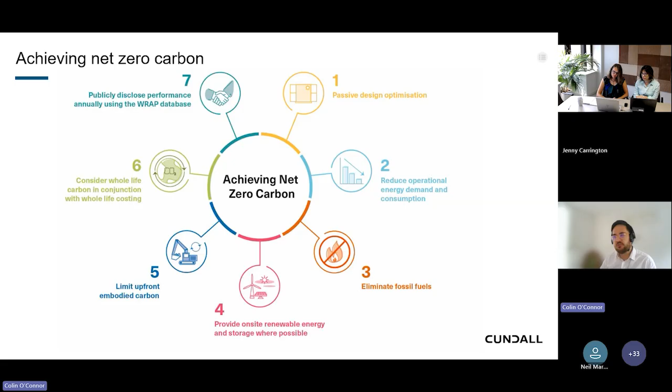I know from an acoustics point of view, we generally look at passive design optimization. Then steps 5 and 6 is looking at can we limit the amount of embodied carbon we might use through our material selections, and tying all that together.

But just one thing - I know I've spent the last 2-3 minutes talking about net zero carbon and lowering carbon. I think it's important from a sustainability point of view not to get stuck in the carbon tunnel vision. Now it's a nice picture that we adapted from another source, but I think the idea is there's so many items that surround what does sustainability mean, what does good design look like, that it's easy to target on net zero carbon and bouncing between operational embodied carbon and energy efficiency, but there's so many other things that are involved with it.

There's the health and well-being side, there's social value, there's air and water pollutants, toxicity - how it all surrounds encompassing. So I think for us as acoustics, lighting and air quality people, it's trying not to get too targeted on the net zero carbon thing and understanding that it's still a wider range of goals that we need to look at.

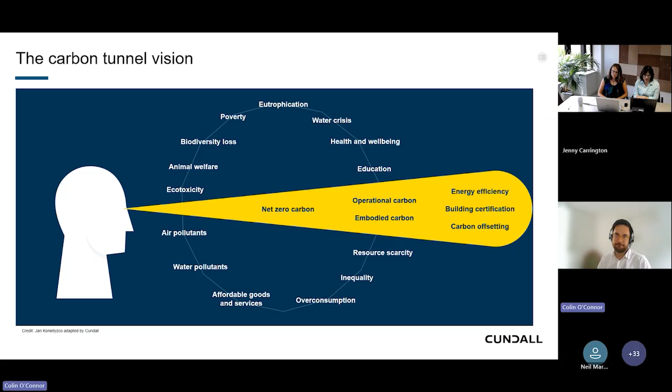And just a final bit on sustainability certifications. A large part of what we look at in terms of the accreditation and the points and the metric scoring systems that we use to determine how workplaces and buildings, what their sustainability rating is, as it were. There's quite a few different systems out there, but a lot of what we look at for ourselves is the US Green Building Council's LEED - so that's how green a building is.

BREEAM, which looks at both the building energy use and the environmental aspects of that, along with the health and well-being of the occupants. And then there's the WELL certifications, which really focus on the well-being of the occupants. So those are kind of the 3 we tend to look at here in the UK, at least.

So moving on to some acoustic case studies. So yeah, acoustics and well-being. I think just first and foremost, thoughtfully designed acoustic environments help to reduce stress, improve concentration.

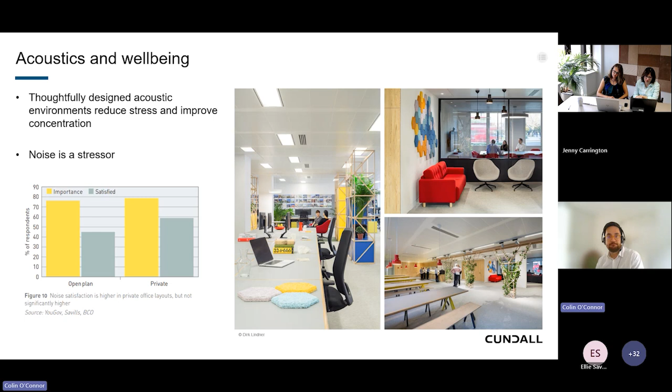Now, looking at sustainability in acoustic design, how do these begin to interject beyond just the health and well-being side of things? So, a short history lesson from an evolutionary viewpoint: hearing is one of our key survival mechanisms. It essentially allows us to listen out for danger even when we're sleeping.

Leading up to today, you've got documents over the years such as the World Health Organization guidelines for community noise and environmental noise guidelines. There was also a House of Lords Science and Technology Committee's inquiry a few years ago that found up to 130,000 healthy life years were lost in the UK because of noise pollution in 2018, and that 40% of the population remain exposed to harmful noise levels from traffic pollution.

Also recently published was the Institute of Acoustics Sustainable Building Acoustic Design Frameworks. This is beginning to really look at what we're doing with regards to materials and embodied carbon, to take that next step on the sustainability journey.

And there's items in there as well. So how do you plan for sustainable design? It's things like avoiding over design, not doing too much, but still providing good acoustic requirements needed for use of the space. Specifying good materials, so natural recycled products. Does it have local production? Does it have a sustainable manufacturing process?

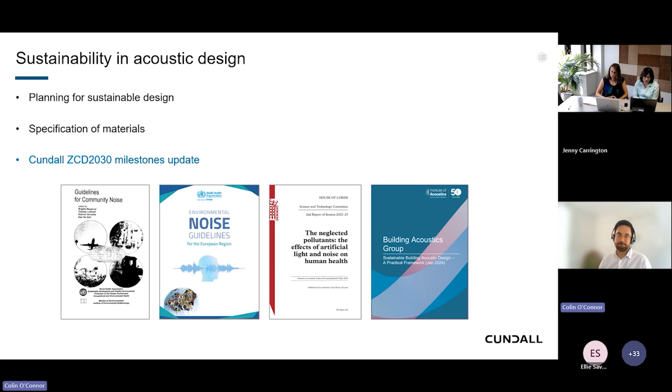Got a case study here of how we're actively looking at this, and how it all overlaps. So I spoke earlier about speech masking. You often see it in a lot of offices, either outside private meeting rooms or within open areas, where you've got the problem of needing good acoustic performance for occupant well-being and productivity.

But the problem is if things are too quiet, you don't have what we call a noise floor. So you can hear private conversations happening. If you're trying to concentrate, you can hear lots of other people talking and it can disturb you. But if you increase the noise a little bit, it starts to cover that, so you don't notice it as much. Think of it similar to a waterfall or a nice wind rustling the trees - you don't notice cars driving by as much. So how can you simulate that in an office place?

The solution is speech or sound masking - adding background sound by installing a speaker system throughout an area that increases noise and reduces the amount of distractions available. So that's the concept acoustically of speech masking and what the benefits are with regards to well-being and occupant use.

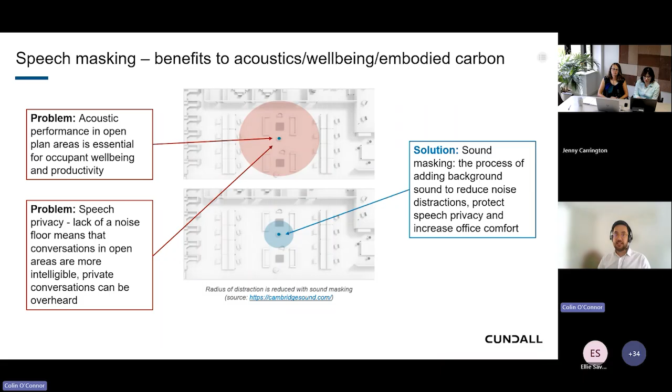But then tying that into certifications I spoke about earlier - one of the certifications relating to occupant well-being suggests that to maintain speech privacy between private rooms and people outside a meeting room, to avoid them listening to private conversations, rather than having a big bulky wall made of lots of plasterboard and internal insulation, if you've got speech masking in place that increases the noise a bit, makes things less disturbing and less able to overhear, you can actually reduce the acoustic requirement of your walls.

Now, the next step is some research that us on the acoustics team have done over the last couple of years - we've reviewed every single British Gypsum partition wall requirement, what materials it's made up of, what the acoustic performance and sound insulation is, and what the relative embodied carbon per meter is for those different wall systems.

So if you look at the table to the right, we can show that in line with WELL, to still maintain speech privacy, you can reduce the wall partition acoustic requirements by 5 decibels, which in turn actually provides quite a large drop in the embodied carbon that a project would be using.

So the next step we're looking at now is how to calculate that for an entire floor plate, for an entire office, and really build it up there. We've had one project so far where we've done quite detailed analysis of this, and the end story is there's actually quite a large saving, both in embodied carbon but also in cost and build time, which really benefits the client and the contractor side too.

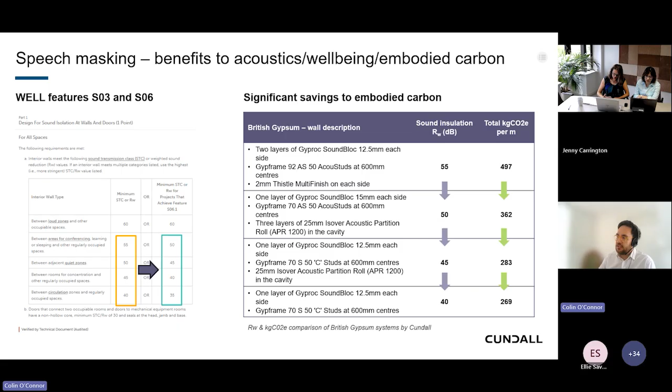Thanks, Colin. So I will be talking about smart lighting design for better living. If we move to the next slide, please.

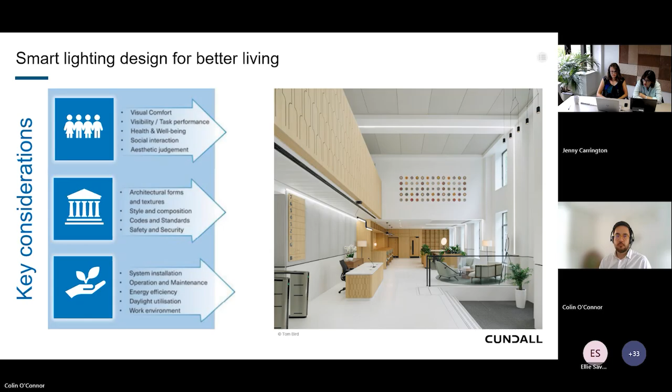So what about the environment? Our sustainability approach is based on the following principles: good quality design. A successful net zero design lighting must go beyond energy efficiency and life expectancy. The quality of the lighting design will have a significant impact on the lifespan of its use, affecting its zero design and circularity.

Adaptability of the lighting system is all about lighting outputs, layers, and distribution. It all must be flexible to allow for variable functions and future-proofing.

Lighting products should be capable of being dismantled to base components, to be upcycled or at least recycled and returned to a materials reservoir. On each project, we allow time for embodied carbon estimations, stating the benchmark in the luminaire schedules that we specify for each project.

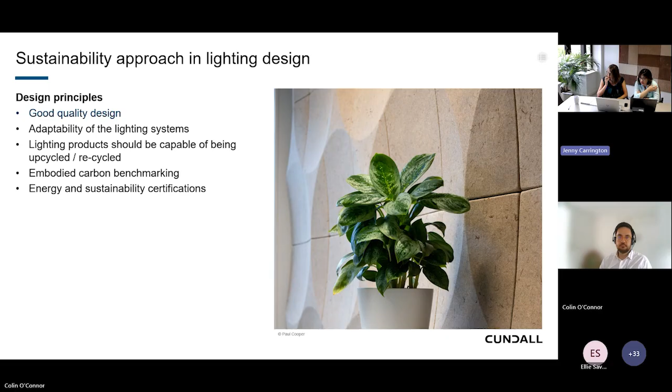We truly believe that considering the environmental impact of lighting systems within luminaire specification must become a key part of every design process. This should also include a study on retrofit and/or reuse options for existing lighting systems.

For example, when we have a project with an existing building and existing lighting, whether it's going to be a brand new Cat A fit out with brand new luminaires, or a 20-year-old university with old luminaires.

Before we start designing, we talk to the client and run a feasibility study to assess whether we can reuse the existing system, retrofit them, upgrade them, or maybe partly reuse them before we suggest something brand new. Next slide, please.

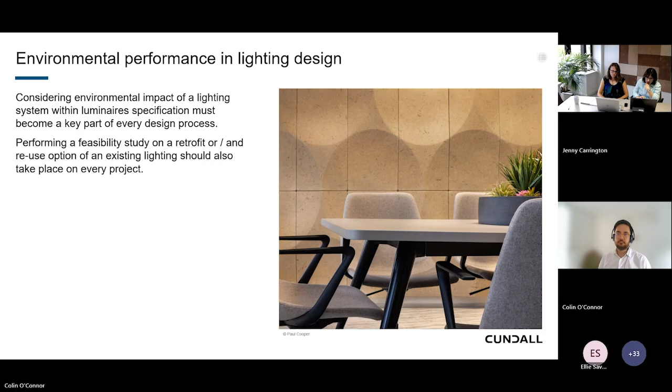On the next few slides, I would like to share with you a case study. It's a small project where we applied all the design principles I have been talking about. This is actually our Birmingham office in Cundall.

On this slide, you can see our large meeting room, where we developed our design in close collaboration with our acoustic team and utilized only the most environmentally friendly materials with the lowest carbon impact.

We also partnered with one of our lighting manufacturer partners, who helped us complete the lighting scheme that includes a lighting track, which you can see on that picture. This is actually a lighting track constructed from offcuts of another lighting track, which was specified on another one of our projects.

It was rescued from a skip on the site. During one of the site inspections, we saw that the contractor got the lighting track delivered on site in 4 meter lengths. Obviously, when they fit it in, they had some offcuts, like 1 or 2 meters of cuts, and they just didn't need it, so they just put it in the skip.

So we said, right, okay, that's not going anywhere. It's been rescued and we reused it in our meeting room, which you can see in the picture.

The luminaires within the track are reused luminaires. We got them from our partner manufacturer's showroom, which had been on show for a couple of years. Obviously, they've got new products to show in the showroom now, so these 2-year-old products which had been used in the showroom, we just utilized in our meeting room.

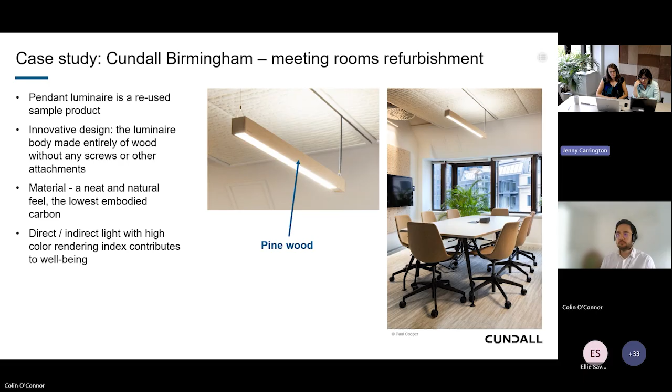This particular product is utilizing an innovative design. The luminaire body is constructed entirely of wood, pine wood, with no screws. That's the luminaire hanging above our table as we speak. The material has a neat and natural feel, with the lowest embodied carbon because it's wood. It's also utilizing direct and indirect lighting, which contributes to human well-being.

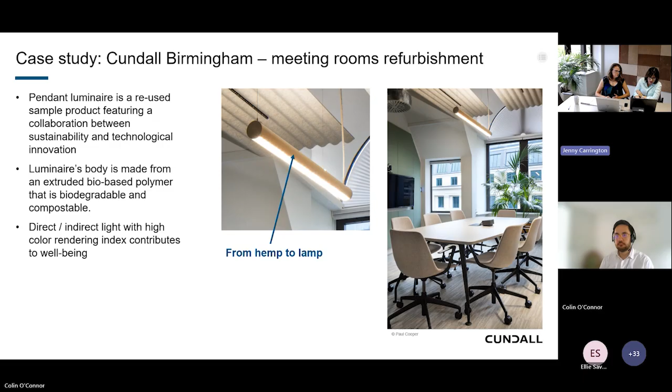Next slide, please, Colin. Thanks, Natalia. So, yeah, next slide, please.

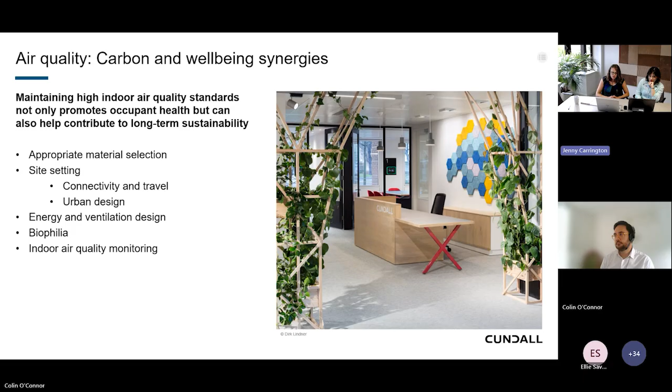As air quality consultants, we've got limited opportunity for influencing material specification. But there's various opportunities we have to look at various aspects in terms of the design process and making sure that air quality is appropriately considered. So we're going to talk about these. Next slide, please.

So, appropriate material specification - ensuring we haven't got carbon tunnel vision, there's numerous aspects that need to be considered when we're advising on appropriate material. At Cundall we've created digital passports for each of the materials, so there's various things that feed into this, as well as the origin of material and its embodied carbon. If it's appropriately sourced, that could obviously help with the air quality emissions as well in terms of transport and manufacturing, the circularity and health and well-being.

For air quality, obviously a key thing is the health and well-being aspect, and are the materials low toxicity, so that there's nothing that's going to off-gas and create issues during occupation. We sometimes look at materials inventory for proposed retrofitting or design of a space, and then we can advise on whether there's another option that might be better.

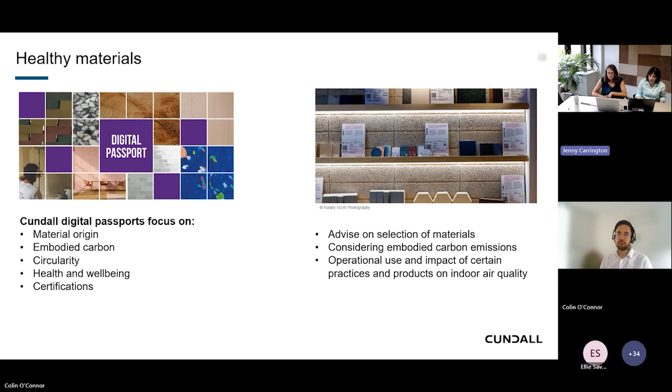Next slide, please. So, site setting - ideally we get involved as air quality consultants at early design stage, and there's various opportunities to try and influence that positively then.

In terms of the site's layout and setting, green infrastructure might seem great for carbon, but it needs to be appropriately placed. It's about looking at the wider setting of the site and trying to extend the distance between sources and receptors. If it's inappropriately placed, green infrastructure could actually make matters worse and inhibit dispersion or lead to localized issues with air quality.

We could do dispersion modelling based on a proposed layout to predict what the concentrations might be at a facade, or we might do monitoring if there's a proposed change to get an idea of the baseline conditions.

In terms of connectivity and travel, it's key to have an effective broadband network so that people don't need to commute as far, ideally, or community workspace hubs so people might come together in spaces and minimize travel time, which has an impact on air quality emissions. And obviously the provision of cycle infrastructure and network to facilitate sustainable travel options.

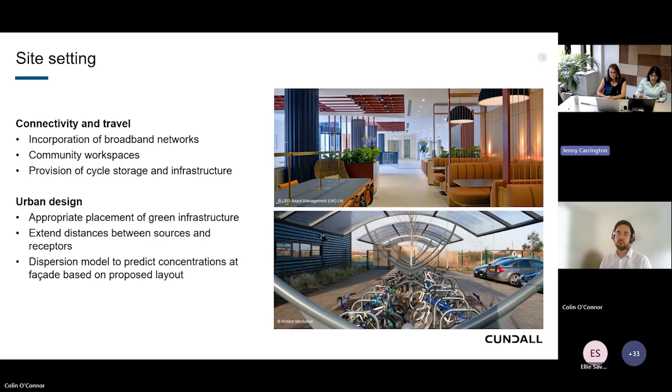Next slide, please. Key for us as well is to try and influence the energy and ventilation design appropriately. Ideally, we're luckily seeing more and more all-electric, non-combustion plant energy strategies, but sometimes there might be standby generators, so it's about trying to influence the options on that.

Sometimes we get told there are three options being considered, and the team or client might be looking at it in terms of capital cost for a given generator, but some of them might be a lower emitting option, and we need to demonstrate that - especially if there's a permit required further down the line, they have to demonstrate a best available technique. Could they perhaps look at other fuel options as well, like sustainably sourced HVO fuel?

Also, if we do dispersion modelling for a proposed design, we could look at the proposed air intakes for any ventilation and proposed openable windows, predict what the concentrations would be, and then feed into whether the ventilation strategy is appropriate.

Is filtration required for mechanical ventilation? And if it is required, is it the appropriate level of filtration? Because if we're over-filtrating, that could lead to higher life cycle and maintenance costs. Ideally, there's the option to future-proof there.

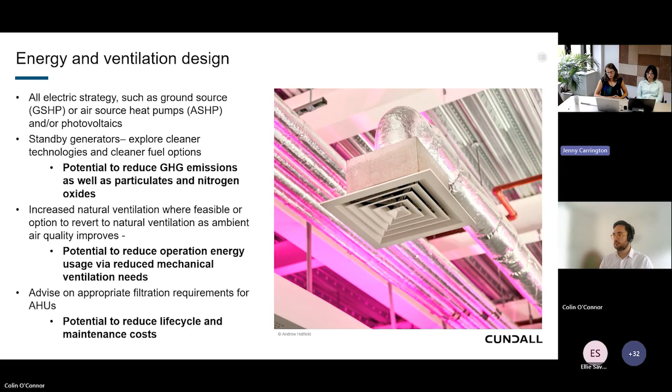So it might be that natural ventilation isn't suitable at that time, but hopefully as air quality improves in the future, that will be an option - ideally a mixed mode solution.

Next slide, please. So, biophilia - in our office, we've got a lot of indoor plants, and it's lovely for health and well-being.

It's whether plants can have a positive influence on air quality, through an impact on humidity levels. Through transpiration, the plant ends up being like a natural low energy humidifier. If you had an active green wall, you might increase the airflow through the soil, and there might be potential for reducing emissions there.

My colleague Curtis Gubb has done some research on this with the University of Birmingham. It might be a negligible impact in a busy office with a lot of people in terms of reducing carbon dioxide concentrations, but it does impact. There's also the influence of the amount of light - if you overlit the space there are various things to consider. But there is potential to reduce carbon dioxide, help humidity levels, and perhaps also nitrogen dioxide through the soil.

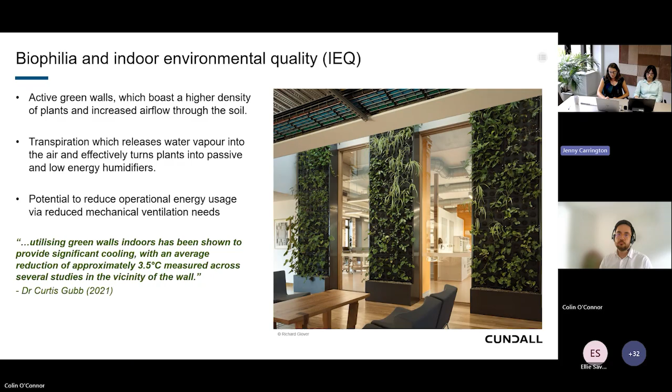So, indoor air quality testing. As a team, we regularly get involved with air quality testing, including indoor air quality testing. We've tested all of our Cundall office spaces - that image there is just one of our offices - but I'm going to talk about a case study instead.

We provided a loan of free monitoring equipment for a local charity, whose office space was very poorly ventilated and poorly lit, and there were concerns about health and well-being there. So we offered to loan the equipment for a couple of weeks to get an idea of what was going on, and it was found that carbon dioxide levels were consistently very elevated, over 1,000 ppm.

Through the study, we also noticed that the lights were regularly left on outside of office hours. So as well as looking at the ventilation and how we could advise on improving that, there was also the option to look at the energy wasted through overuse of lighting.

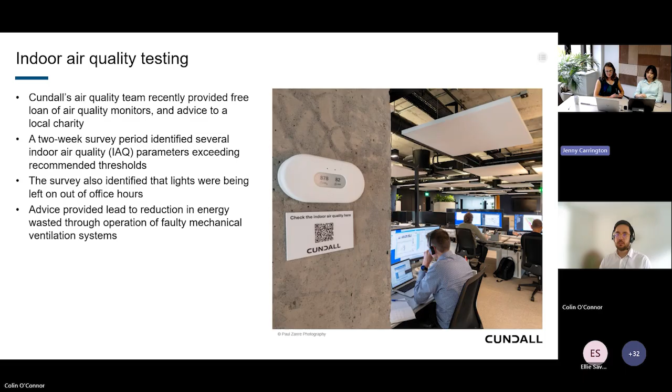Back to Colin. Thanks for that - so to bring it all together and summarize what we're doing: it's through the lens of sustainability, and there are multiple things there. It's not just lowering carbon, it's also the health and well-being of the people using the space, and looking at the materials and the circularity of it as well. So we're taking a holistic approach and a fully balanced view on this.

We've also got some initiatives that we're driving through. We have our material database - within the company we gather whole life carbon, circularity information, material health, and where we can, operational energy and acoustic performance data on a huge number of materials, which we can promote and discuss, or review what other things are being used and whether we could do better.

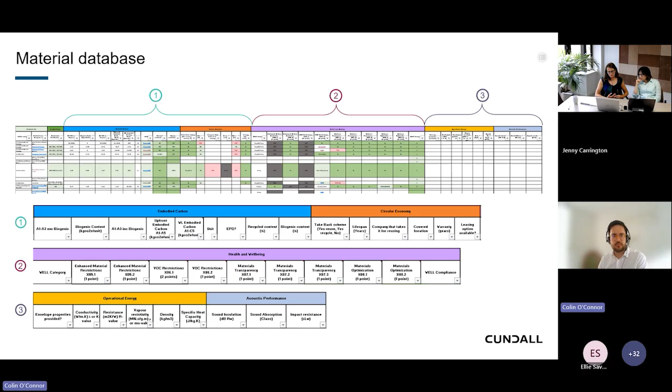We've got some other initiatives - I know Jenny touched on digital passports for a number of materials. Again, we're not just documenting the carbon view of it, but where the material is coming from, whether it's circular, whether it's recyclable, what the health and well-being aspects of it are, and how it promotes other certifications.

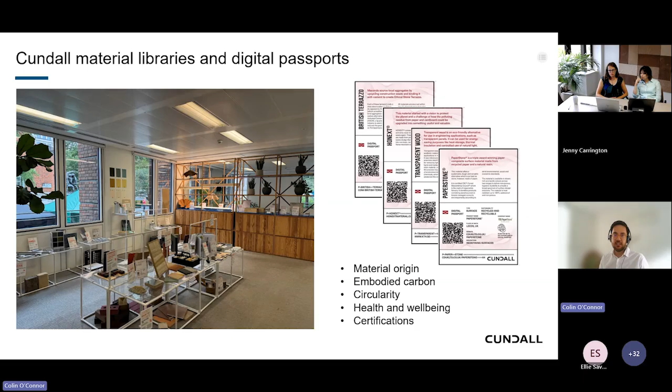In our London office and other offices as well, here's a picture of a library of lots of cool materials that we like and want to show off, working with a lot of suppliers and manufacturers to help promote what they're doing.

A little case study - our sustainability team can give a much better talk on this, but I'll touch on it quickly. We've also got Cundall's new Edinburgh office that we moved into recently. As part of the design, we had initial targets for the upfront and whole life embodied carbon of the project.

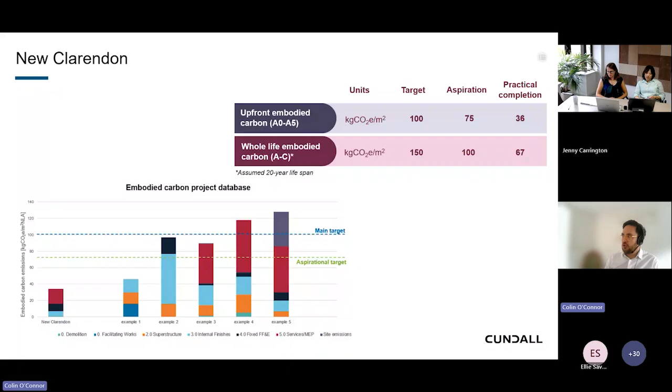We had targets originally, and we pushed them to make it more aspirational. But on practical completion, we found the actual numbers achieved were a lot lower than both the initial and aspirational targets. Part of the reason for that is being quite smart about how much stuff we could reuse from our previous office and bring over - could we refurbish meeting room chairs, bring across sofas, and very carefully dismantle existing glazed partitions from office spaces and move them to different spaces.

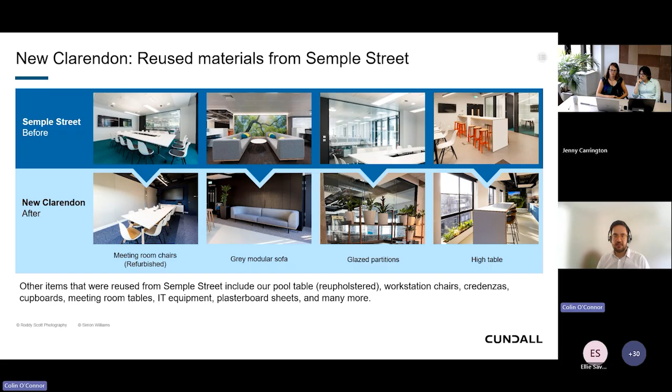A lot of work involved with the contractors to really discuss the process for that and how to retain the quality of these things when we're carrying them over. But lots of stuff to reuse, lots of low carbon material choices, and this is all brought through all the work we've had together as a wider company throughout all the different disciplines. It's looking at what cool materials can we use, what's circular, what's got recycled content, tiles, paneling, paint that's being used, do they have low VOCs to also contribute to that better indoor air quality for all the occupants.

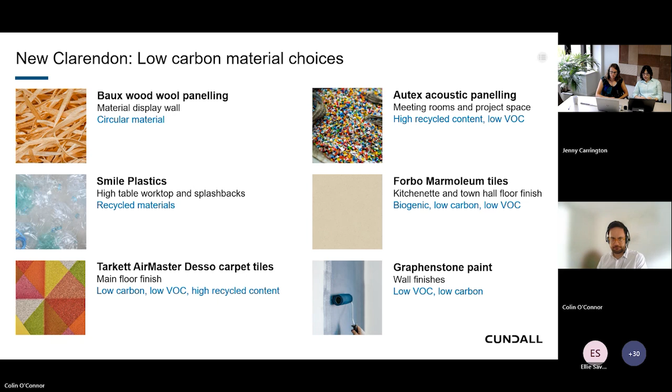So just to wrap it all up and summarize what we've been through. I think the final thoughts are that it's important for us to actually focus on achieving actual health and well-being benefits, and not just for the sake of gaining BREEAM, WELL or LEED certifications, just doing box ticking exercises. We really need a structured and planned approach for how we're doing all of this. From us as individual specialist designers, with all the best will in the world, we can push for it as much as we can. But ultimately, we need to work with the rest of the design team, with the architects and contractors, to be able to do that. But also, there isn't any real legal requirement or legislation to really push us or require us to do that.

So at the end of the day, what we need really is a top-down approach. It's got to be the client themselves saying, we want to be low carbon, we want to have good health, we want to have good well-being, and we want all of that to combine. By those key decision makers setting that up front, then they can really drive that and allow us to deliver it. So yeah, thank you very much.